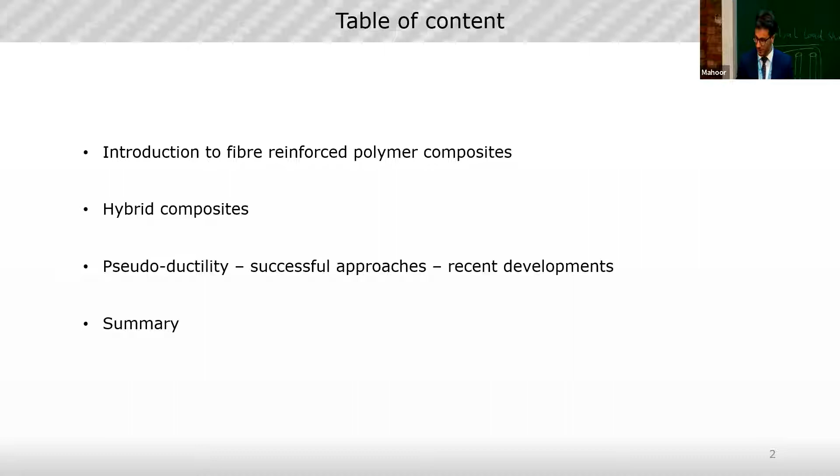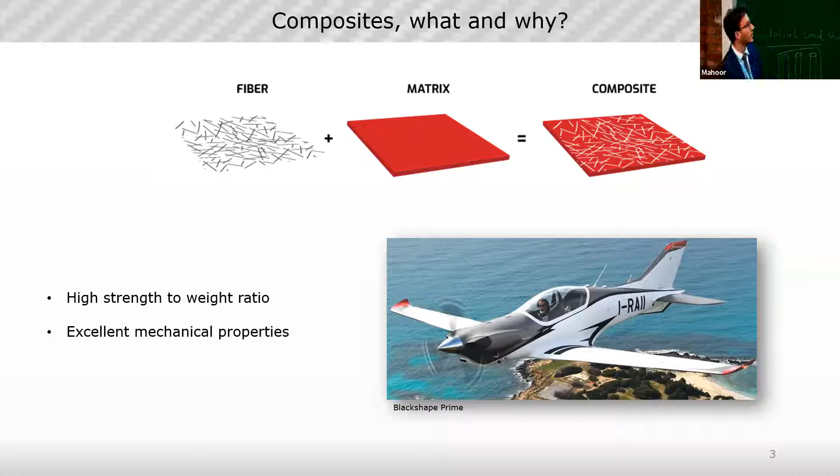What are composites? Everybody knows this, it's obvious things to say, but let's remark it. It's made by fibers together with matrix. Why they are so interesting is because they are outstanding materials with excellent mechanical properties, and we like them because they have a high strength to weight ratio. This makes them more desirable in comparison to metals, especially for high performance applications, for example the aircraft industry, where they are quite attractive.

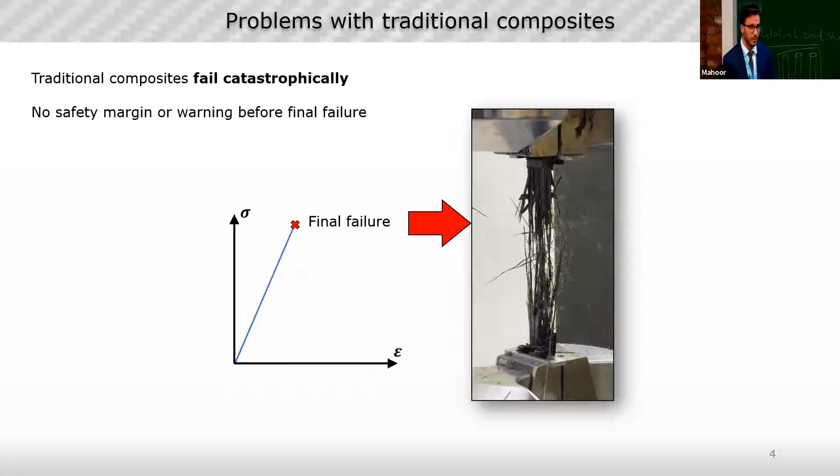What's the problem with composites? They present brittle behavior after a linear elastic behavior. They fail catastrophically, and this is of course an issue from the safety point of view. There is no safety margin before the final failure, nothing that tells us that this material is going to fail so we can do something to avoid it. So sometimes this failure could be unexpected.

One of the biggest issues with composites, common since they are made by a combination of plies that create this laminate, is that the plies can debond from each other, causing delamination. This delamination could seriously compromise the load bearing ability of the material.

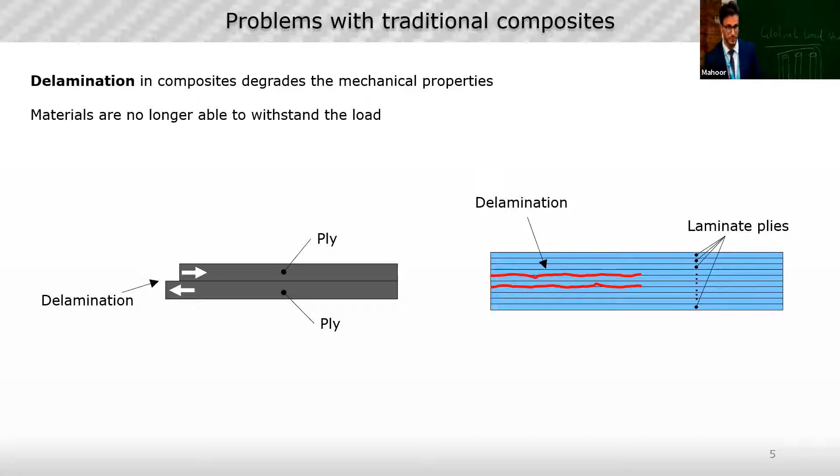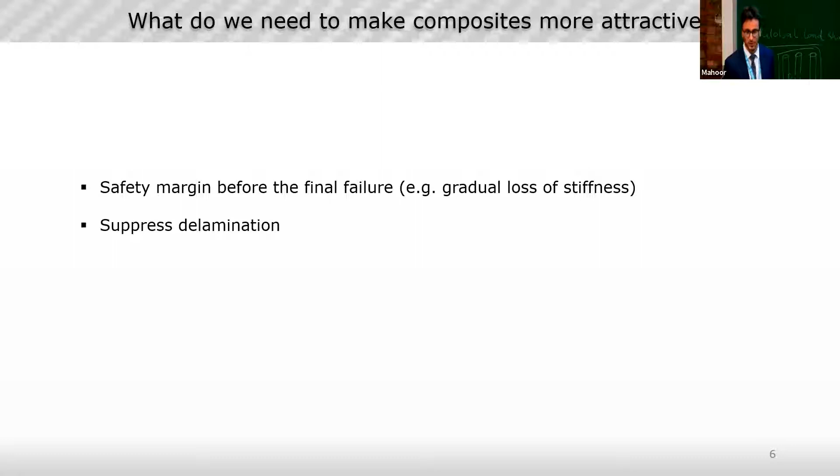Based on these two main problems related to composites, what we need, for sure from the safety point of view which is one of the most important, is a kind of safety margin before final failure. We need to know when the composite is going to fail, when we have an overload, when the composite is no longer able to carry the load because it was damaged inside and it's not possible to see with naked eyes. We also need to find a way to suppress delamination. But the delamination point of view becomes more clear towards the end of the presentation, which is more related to the approach we use in Budapest.

So to provide this safety margin, one of the most common approaches is to hybridize composites, to create a kind of multi-stage damage process. In this case, Yantel of course introduced hybrid composites very well.

To summarize, these materials are mainly made from combinations of glass and carbon, the most common composites. They give us a combination of behavior, an average behavior between low elongation materials and high elongation materials. There are different ways of hybridization, which could be summarized with these kinds of layouts: interlayer hybridization, intralayer, and intra-tow hybridizations. All of them are good solutions for generating pseudo-ductility in hybrid composites.

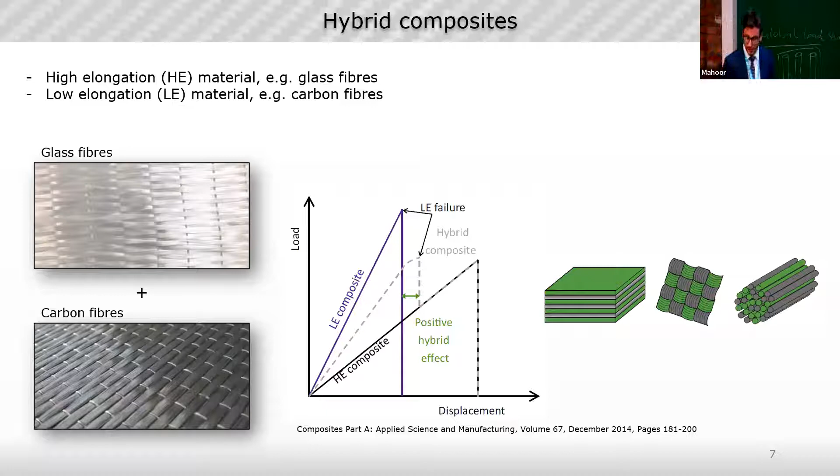As I said, we are interested in creating this multi-stage process. First of all, it's necessary to see that we overcome this linear initial stage. Then we enter a stage that could show different scenarios, either unstable or stable, depending highly on how the hybrid composite is designed. In this stage, we can see that some damage is occurring inside the composite, before approaching the so-called final stage, where the composite, after some extra interval of strain, is going to fail.

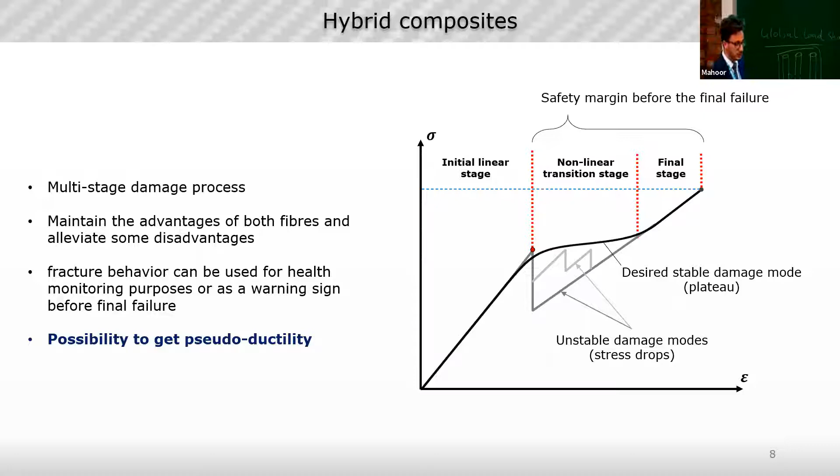Hybridization is, let's say, one of the most effective ways to achieve pseudo-ductility, and now I'm going to show you why. Let's define what pseudo-ductility is, and why 'pseudo'.

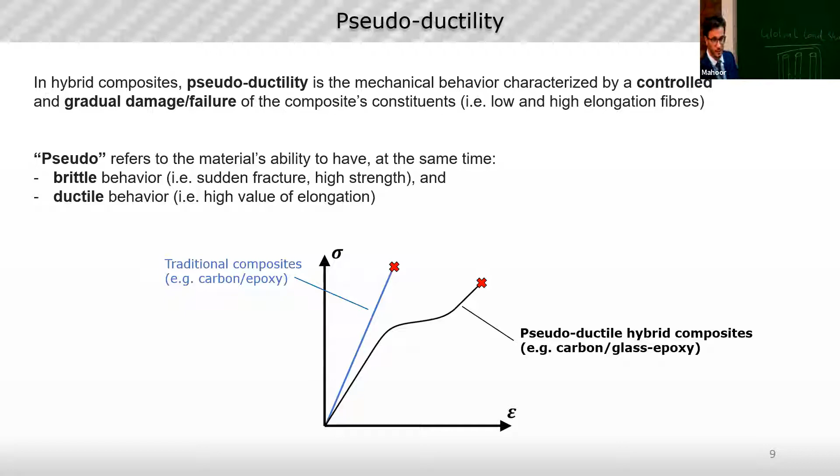Of course, everybody knows the ductility definition, which is mostly related exclusively to metals, and is the ability of the material to yield and keep some permanent deformation. But in metals, when unloaded, they go back to the zero load level and when reloaded, they come back with the same elastic modulus. In composites, this doesn't happen. This combination we call pseudo-ductility is because we have damage, so we still have a brittle behavior inside. The feature of composites is that they still show fractures inside combined with high strength, and the ductile behavior is that we can extend the deformation of composites up to a high value of elongation.

Different approaches of hybridization could create different grades of pseudo-ductility. Here we see a schematic of how many different hybridization approaches generate it anyway.

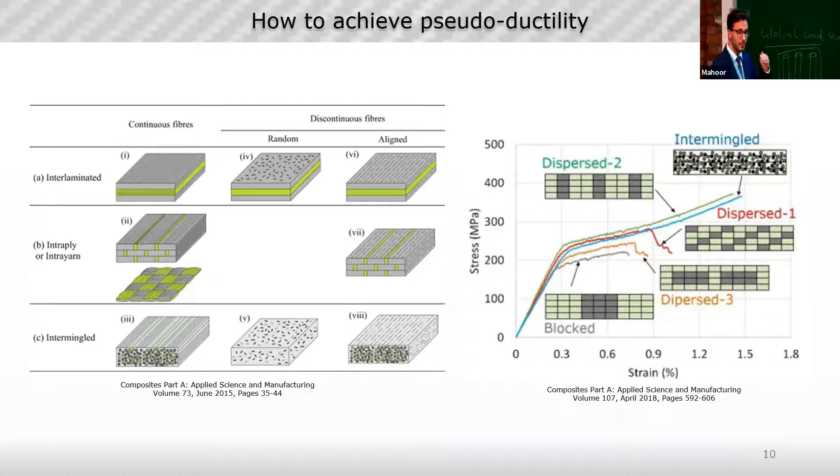This approach, hybridization, is good because it separates the fracture process, isolating the low elongation fibers together with the high elongation fibers. This is one of the base concepts to generate a plateau stage that progresses stepwise until final failure of the material.

Hybridization is not the only approach. I will focus more on hybridization in the next slides, but there are other approaches as well, and one of them is a very clever design of material which exploits the angle ply design of composites.

There are composites with a stacking sequence with different angles to each other, and when pulling under tensile load, let's consider the rotation of the fibers. This rotation gives us the possibility to create a stable transition.

This configuration could also be considered borderline ductile. The authors, led by Jonathan Fuller, called this a ductile material because with this loading and reloading test they showed what I said at the beginning about the definition of ductility for metals: that the elastic modulus at the beginning was exactly the same.

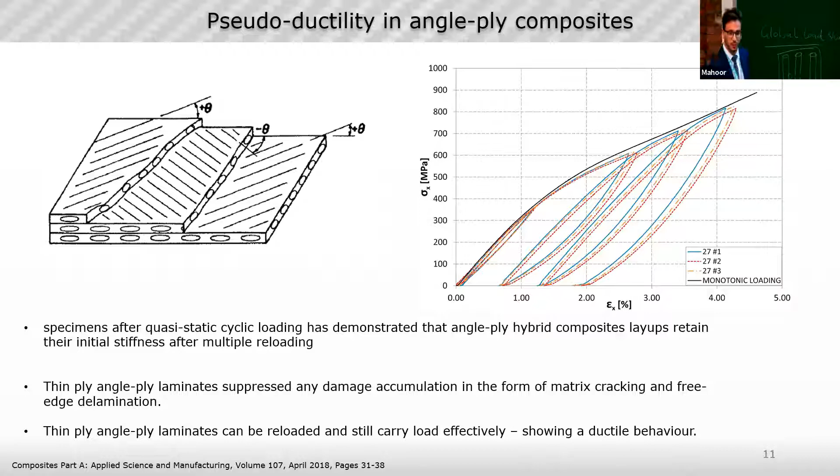Short fibers, and now we are in the hybrid composites category. Short fibers are one of the easiest ways to achieve pseudo-ductility, because the fracture process is based on the gradual fracture of the short fibers. The pull-out of the short fibers and their fracture generate different grades of pseudo-ductility, depending on the grade of hybridization.

I want to highlight how the initial stiffness of the material increases as we increase the content of carbon. More carbon, since it's stiffer than glass, increases the initial stiffness, and short fibers let us exploit the potential stiffness of the carbon, which is important because with hybridization we can lose some performance of the carbon layer.

But in this case we can play a bit with this grade of hybridization and try to exploit as much as we can the potential of the carbon while still having a pseudo-ductile effect. The only issue with this configuration is that it's quite challenging to create the layup and align the fibers.

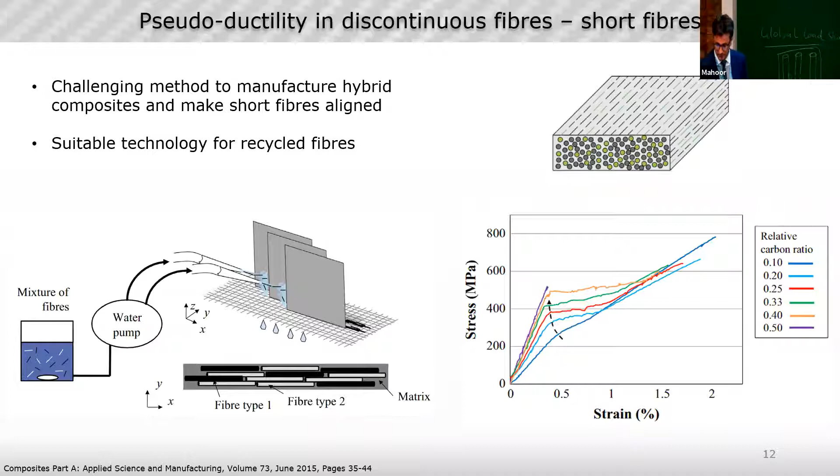Another strategy for generating pseudo-ductility is not based on fracture of the fibers but on delamination, strategically creating and designing the layup to gradually delaminate the material. This configuration is called brick and mortar.

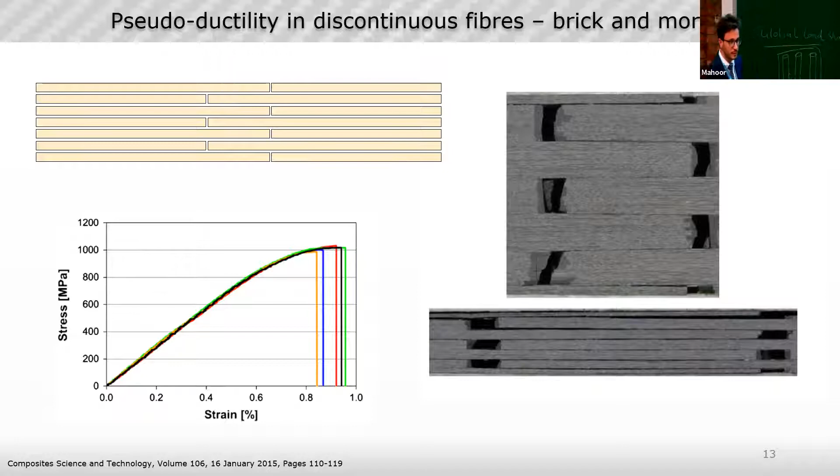It's also possible to generate this kind of deviation. Approaches for pseudo-ductility based on delamination allow us to generate a very smooth transition, which could be harder to generate with fragmentation or fracture of the material. Of course this depends on how well the material is designed, but the thinner the carbon, the smoother the transition—I'll talk about this later regarding fragmentation—though it's not as easy to find this smooth transition in other approaches as it is in delamination-based pseudo-ductility.

A further step in this strategy is to exploit carbon epoxy platelets, creating an interply hybridization.

So we have a kind of sandwich where the external plies are the glass layers, and in the middle we have this continuous layer of carbon. The carbon is pre-cut, so we have discontinuities, and the aim of this is to trigger delamination. In fact, in a tensile test, we see that delamination starts propagating from the cuts and continues. As soon as this strain interval ends, it gets a kind of saturation. And at the end, in the last stage, we have the pull out of the glass solely.

I wanted to say something, but I forgot.

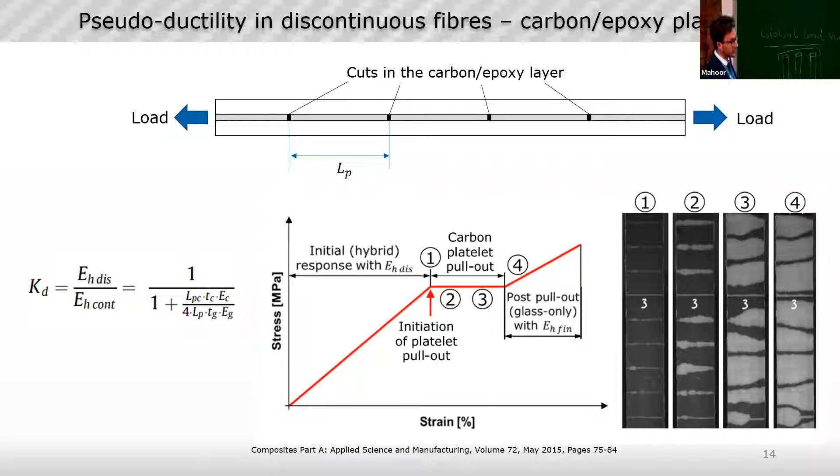Anyway, the problem with this, exactly what I was looking for this formula, is that we cannot create cuts as much as we want. Of course, denser the presence of the cuts, better is the pseudo-ductile behavior. But we reduce the initial stiffness of the material because we reduce the contribution of the carbon to the initial stiffness of the hybrid material. So we need to find a trade-off between what level of pseudo-ductility we want to achieve and the initial stiffness as well.

And here comes the fragmentation approach. Fragmentation is one of the most common approaches used. It relies on the use of thin plies. Thin plies are very good in suppressing delamination. They have low energy when they fracture, and the fragmentation is perfectly visible here, because hybrid composites also have this special feature: the translucency of the glass allows us to see what's going on inside.

So we can see how the material or laminate fragments, we can see the damage, and that could also be useful for having a safe material. But in this case, the fragmentation requires that the central layer, the low elongation material, which in this case is the carbon one, starts to fracture, and it forms multiple fractures together with increasing load.

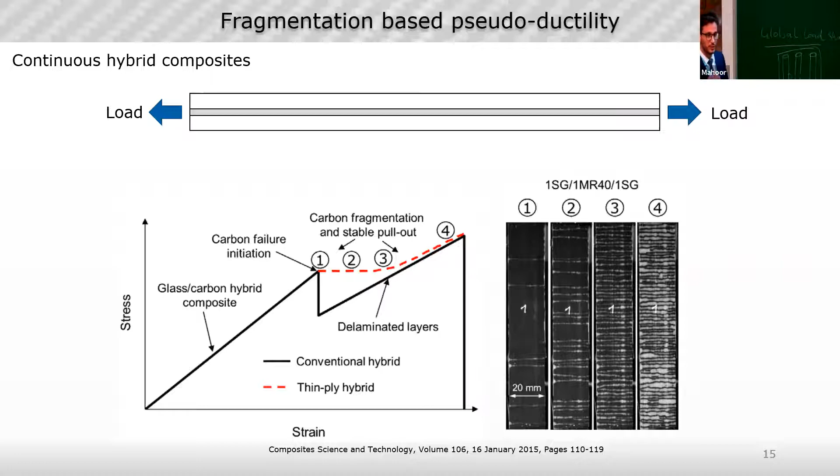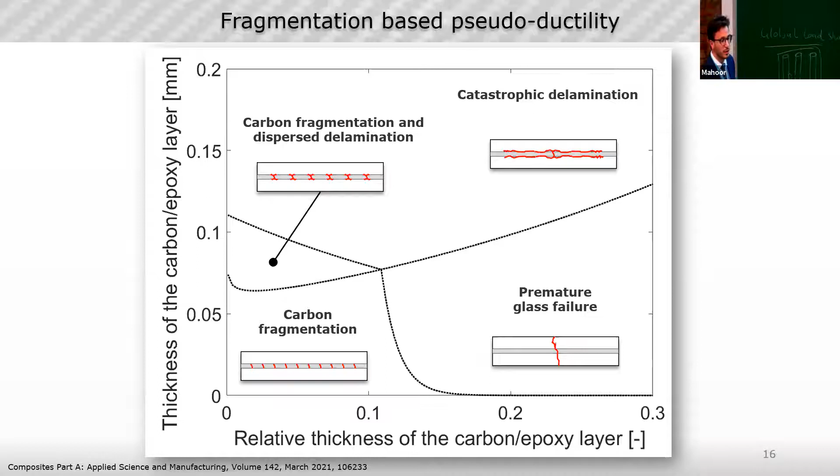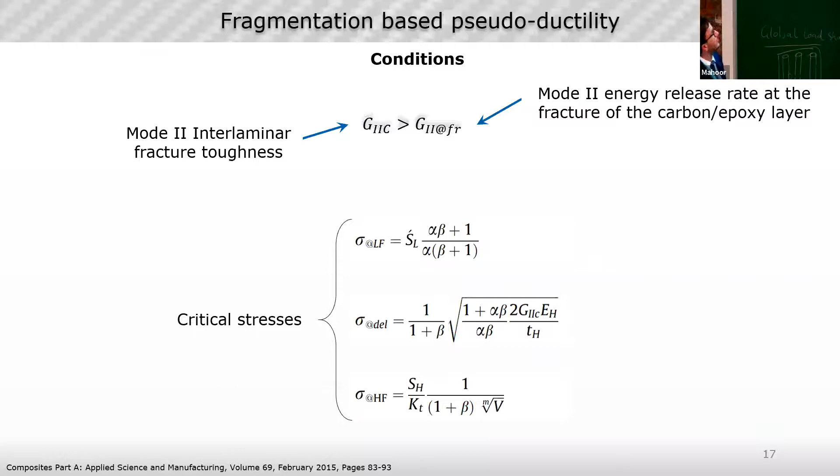This condition summarizes perfectly what I said before, that the interface property counts a lot in the material. Not only the thickness, which is summarized in the formulas to generate the curves in the damage mode map, and the thickness is included in the alpha and beta parameters, which are the ratio of the thickness and the elastic modulus of the two materials, but this condition counts a lot too.

The generation of the damage mode map is a very useful tool for designing material, for designing hybrid composites, especially if you want to achieve pseudo-ductility. It's a parametric process where for each scenario we compare the delamination stress with the fragmentation stress, and if the fragmentation stress is lower than the delamination stress, we get fragmentation instead of delamination. This can be summarized in a flow chart, which is quite easy to understand.

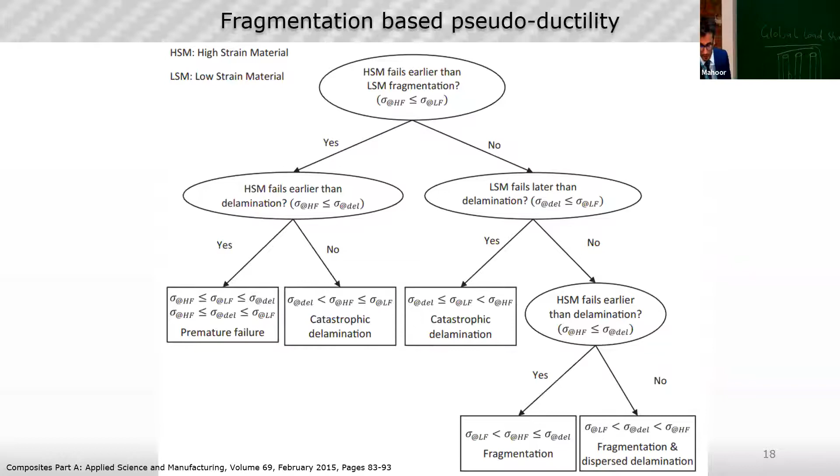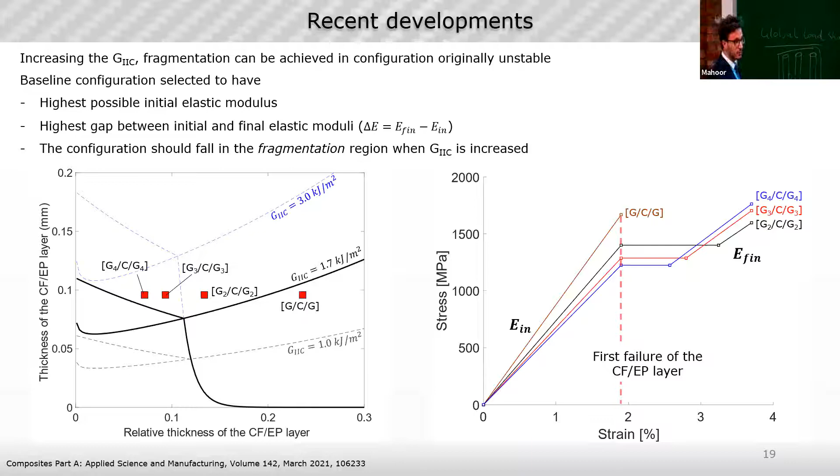Doing a parametric study in the damage mode map, just changing the fracture toughness of the material, we keep the same configurations but act on the interface to make it tougher. This toughness also affects the possible scenarios we may have. So if some configurations with the baseline material give a certain fracture toughness value, and we hypothesize four different configurations, these configurations are bad in any case with the damage modes.

But if we increase the toughness, we may have fragmentation with some configurations. The approaches we recently implemented at BME were to act on the interface using a standard thickness carbon layer. This way we may have good stiffness of the material at the beginning, but we want to use energy absorption mechanisms, introducing dissipation mechanisms that try to suppress the delamination and let the carbon fragment.

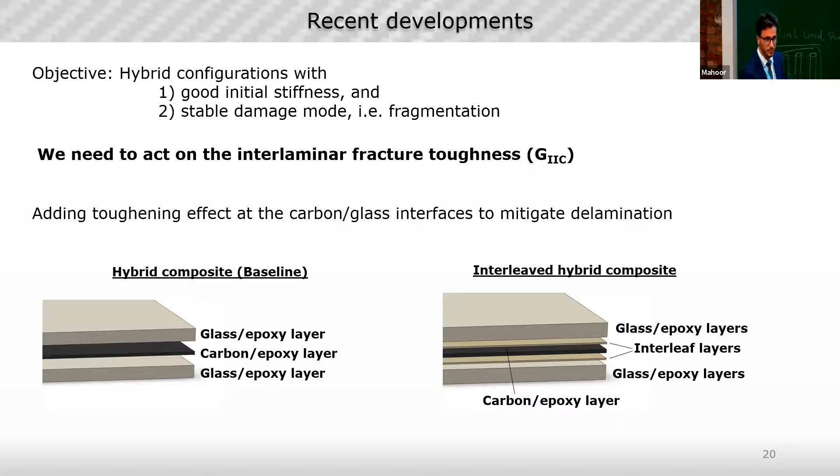In this case, the epoxy films contributed to reducing the stress drop, but some cases were borderline. A few cases were pure pseudo-ductile.

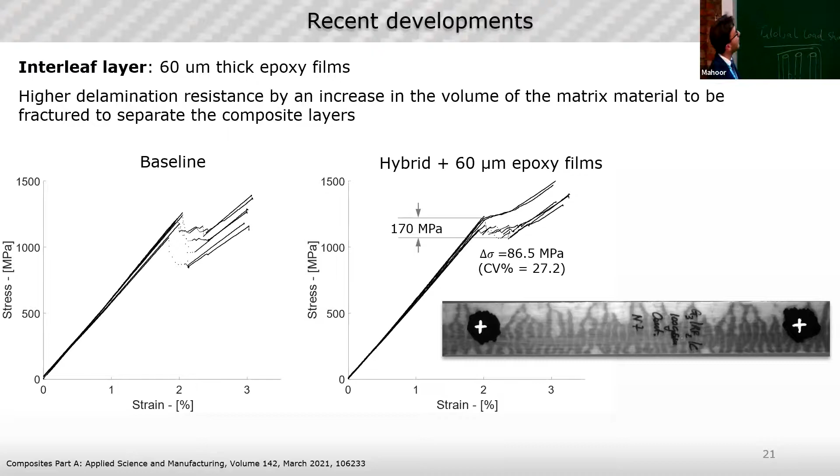But the outstanding results come from the nanofibers. They are capable of introducing crack deflection mechanisms or crack arresting mechanisms that can help us suppress the delamination when the cracks start to propagate at the interlayer, between the carbon and the glass. Putting in the layer of nanofibers gave us a very nice transition, so very good pseudo-ductile behavior.

I also want to highlight the practical aspect of this approach. It's not something that requires tricky treatment of the material. This nanofiber layer is like a paper towel, so it's really easy to handle, especially if the material is made by prepregs, so the stacking process, the manufacturing process, is very easy to perform. Putting this nanofibrous layer is just like applying it on the prepregs, putting the rest of the glass plies on top of it, and the material is made.

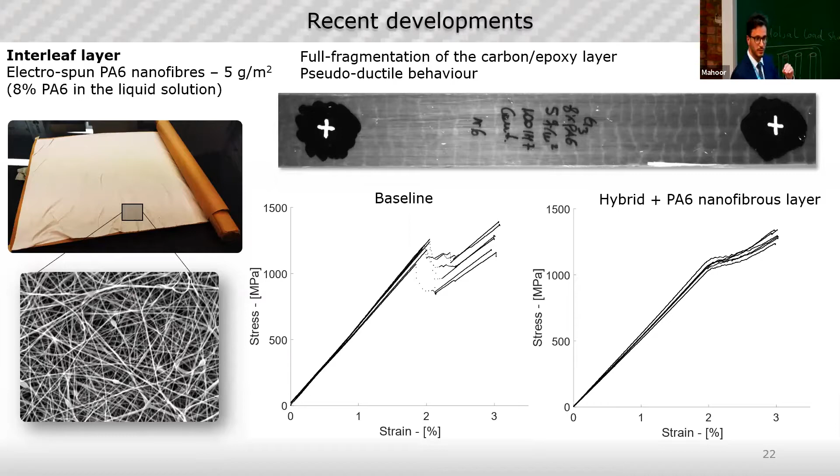The good thing is also that it doesn't affect the final thickness of the material, because this layer absorbs the resin of the surrounding fiber reinforced layers and gets compressed. Of course, it's produced in autoclave with 7 bar, but instead of using a resin film or thermoplastic film, with this approach we may keep the thickness of the material constant and not affect the initial stiffness.

Just to summarize the key facts about pseudo-ductility: it can be achieved mainly through hybridization. There are many approaches, but I would say that for high-performance materials, for high-performance structures, especially for aerospace or automotive industry, hybridization is the most efficient way, and it's perfectly suitable for making hybrid composites safer.

I also want to highlight the practical aspect of this approach. These methods are perfectly suitable for practical application and ready to be introduced in our industry. So that's it, thank you very much.